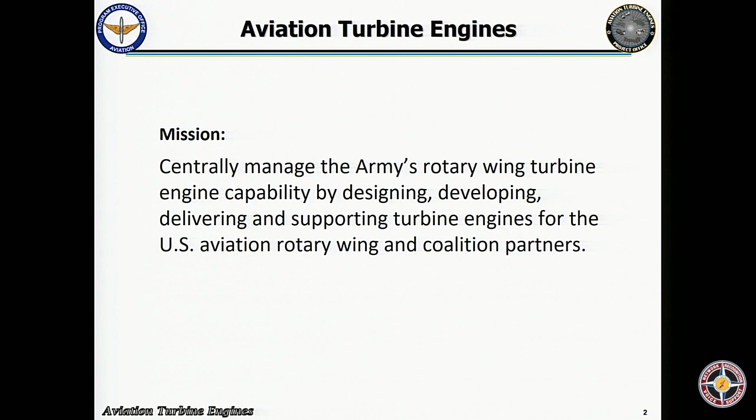And so he established, in February of this year, a combined aviation turbine engine office that took on the mission of not only the ACAT 1C program for ITEP, but also the management of the T55 and T700. As General Muntz has indicated, we're evaluating other opportunities as we make a strategic effort to consolidate and bring on more capabilities associated with power generation. But what we don't want to do is lean forward too fast before we understand how to best manage that activity.

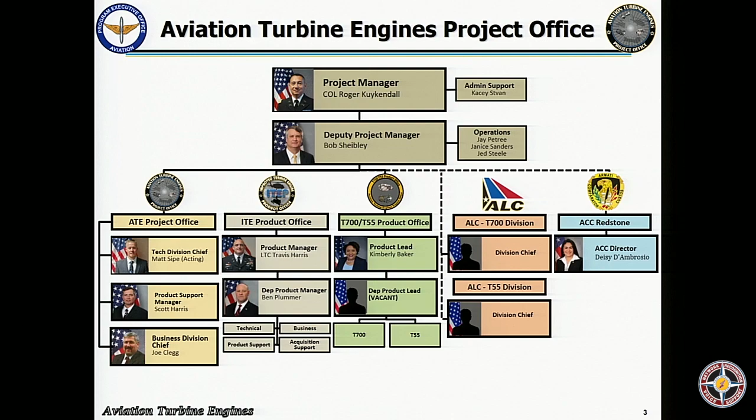So that office I explained is led by Colonel Roger Kuykendall, the project manager, and his deputy is Bob Sheibley. Within the office right now, we have two major product lines: the ACAT 1C for improved turbine engine, and a second product office with a product lead, Miss Kimberly Baker, managing that. We've also established an integrated project office, with on-site ACC at Redstone and an ALC, in order to manage that entire lifecycle component and give us a better acquisition capability.

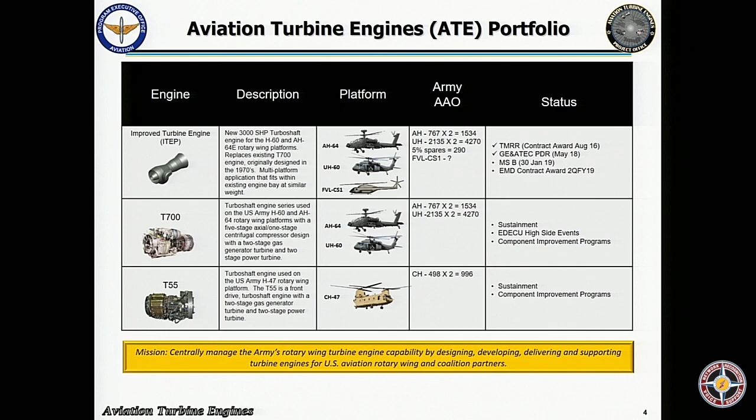So that portfolio we're managing includes the ITEP engine, which is a class replacement engine for the T700 in the future. We've recognized that the T700 has been in service since the 1970s. It's been modified and continued to move forward, and it's performing great, but it's meeting the end of its improvement capability. So the Army leaned forward and looked at development of a new engine to get us the class power required to lift the AH-64 Echoes, the UH-60 Mikes, UH-60 Victors, and what may become the FLRAA as requirements in the 3,000 shaft horsepower range.

Right now, the status of that program—I'll talk more on the next slide about where we stand and the path forward to get it to a qualified capability out to the field. You can see from the numbers we manage, from the T700 to the ITEP, we're looking at about 6,000 engines in circulation to manage that program, and then just right around 1,000 to support the T55 CH-47 fleet.

So ITEP in itself is an ACAT 1C program. We are pre-milestone B. That program was to move forward and bring forward the limitations on the 701D platform to support the H-60 and H-64. A lot of folks get wrapped around the increase in power—the shaft horsepower is a raw component.

The interesting thing to think about is that we're really trying to achieve 6K95 power for those two platforms. There's an altitude lapse rate associated with the engine, and so the target we're looking for is greater than 1760 horsepower at 6K95. There's not an intent to drive in and cause a lot of powertrain integration requirements for the aircraft and other things—it's to have that capability.

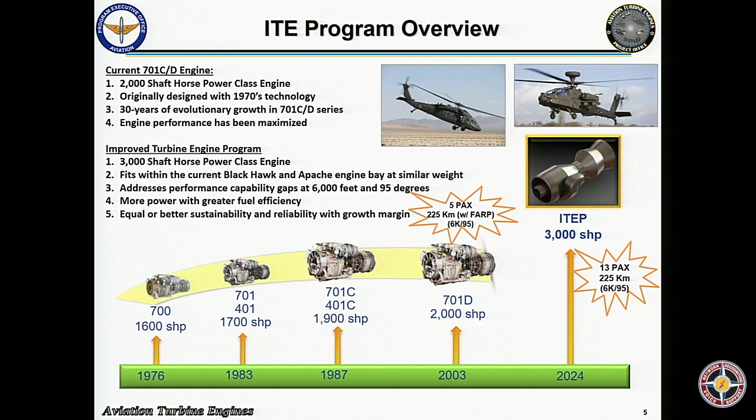As you can see, the 701D in the 2003 timeline is limited now in meeting their mission at 6K95—only being able to carry 5 PAX or having a FARP every 225 kilometers. So what ITEP gains them is the ability to carry that full mission load to achieve that mission at high altitude or high density altitude environments.

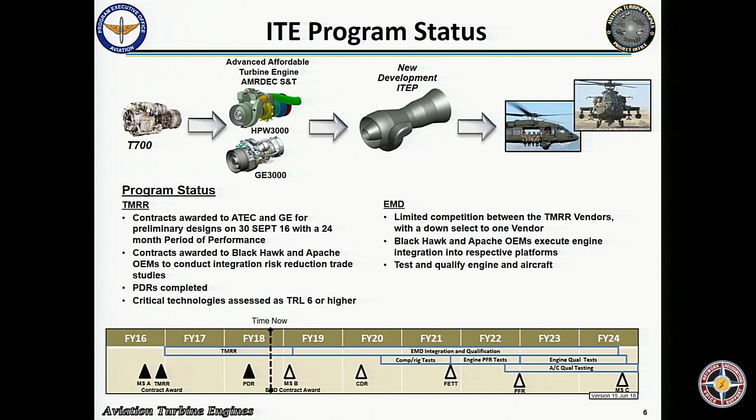So the program status right now for ITEP is that it was a science and technology program that transferred over—the Advanced Affordable Turbine Engine program—put forward the intent to look at hardware opportunities and advancements that would provide better fuel efficiency, better power to weight ratio, higher reliability, and improvements in what was hampering current engines: sand and dust environments. So improved particle separation was a big component of the AATE program.

Out of that program, we established the ITEP and awarded a competitive TMRR contract to 2 vendors: the Advanced Turbine Engine Company, which is a joint venture between Pratt & Whitney and Honeywell, and General Electric, to plan out and provide a preliminary design review for their products to meet this objective.

And so during the TMRR, we did several trades analyses to include supportability trades were a big component of that. And in those supportability trades, we looked at things like human systems integration and maintainability analysis, and advancements in gaining greater availability.

We've also been leaning very far forward during this phase of the program to look at our depot maintenance support planning, reaching out to CCAD, even though we still have to do a formal DSOR as part of the program, which we'll do in EMD once we down select. But we understand CCAD is a center of industrial technical excellence for aviation turbine engines, so we've been discussing how that transition would go, what needs to be required, and we shaped a lot of what was in the EMD RFP based on those engagements and early planning.

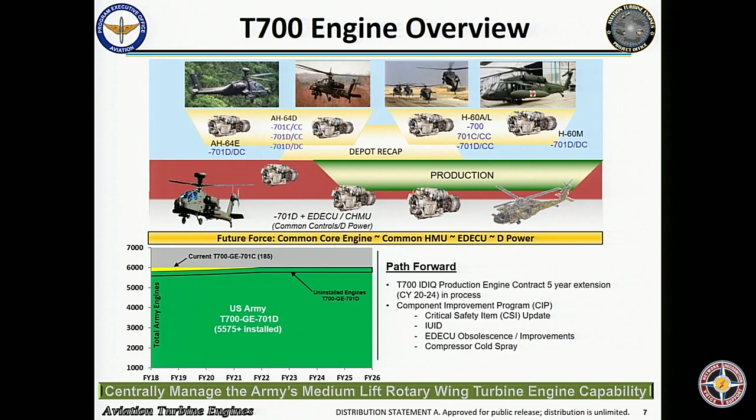We're now removing down to the last of the T701 Charlies, and those are distributed across all 3 compos, not limited to just one, but that number is down below 180 now. Most of the fleet is operating the -701D engine. There's a combination of controls that can meet up with that based on what platform it's installed in, but we're trying to get to a common control system as much as achieving the pure fleet of the 701D.

The office is working through several CIP programs to try to continue to improve. The biggest thing is that we can't focus all our attention toward the acquisition of new products because we recognize it's going to take a considerable amount of time to field all of that. So we've taken a lot of time to look at how we can continue to maintain the current engine throughout its life cycle until it goes through final disposal.

We're devoting a lot of attention toward reliability and continued maintainability improvements to afford better supportability out of the engine. Some of that includes CSI updates to ensure better tracking of parts, including marking of IUID for better asset visibility. With EDECU electronic components, you're constantly looking at DMSMS and end-of-life effects on electronic circuits, so we maintain a lot of visibility there to stay ahead of the game on those components. We're also looking at reliability and maintainability improvements for repairs through actions like cold spray on the compressor.

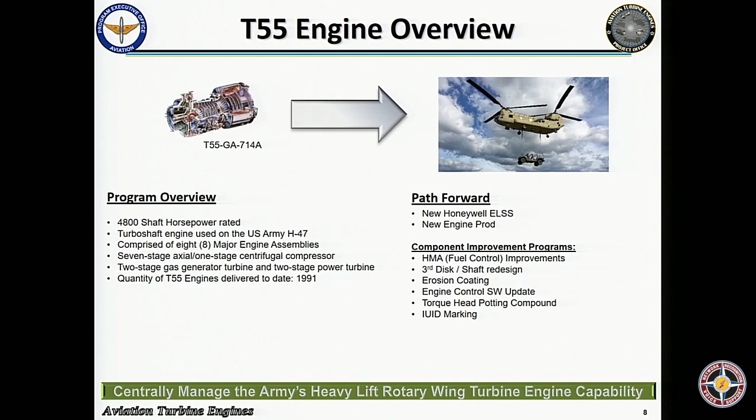As for the T55, the engine is performing very well out there. In fact, we're looking at several areas where we've increased at least once the time between overhaul on the engine, and we're getting ready to undergo a second study to see if we can extend it even further to get more time on wing. There are several improvements within the fuel controls, the HMA, and different ways to address erosion in the field. All of those activities are intended to improve reliability, availability, or maintainability in some fashion.

Okay, and I'll pass it on to Colonel Clark.

Thank you, Scott. I'd offer today that the future of Army aviation is on the cusp of a stepwise increase in fleet-wide capabilities, but I'll caveat that with so long as we don't fumble the sustainment football.

To back that statement up, I would look at what we see in the environment that is either enabling this statement or not. You could argue that the physics of aero haven't changed. We're still applying the Navier-Stokes equations. But what has fundamentally changed, in my opinion, since our last attempts in the 80s, 90s, and even the early 2000s, is access to high-performance computing.

When merged with manufacturing technology, such as additive manufacturing, we're able to now fully exploit those equations and achieve exotic layups of materials, novel designs that address the full complexities of the aero environment. Not only to achieve a material outcome, but to do so in a repeatable fashion, which has always been a challenge as we've tried to stretch the bounds of rotary wing aviation.

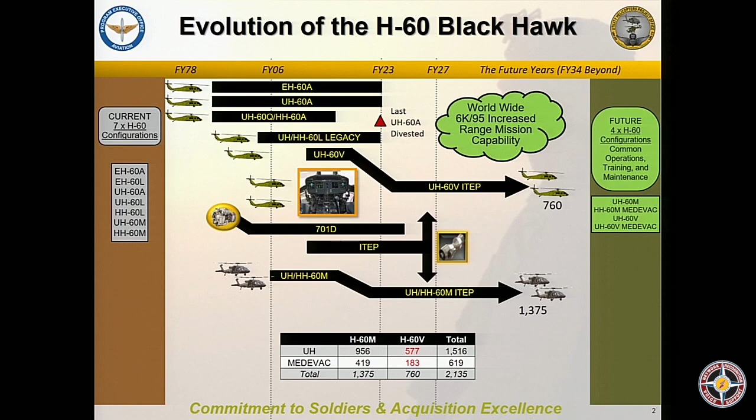We're currently taking action to divest our 60 Alpha aircraft and recapitalize our Lima aircraft into Victors. So we go from that big number of configurations down to four: UH-60 Mike, HH-60 Mike, UH-60 Victor, and UH-60 Victor with a medevac kit installed. We have a plan laid out to get us there as soon as possible. A large part of that relies on CCAD to do the installations on those 60 Victor kits, and I'm going to talk about that in just a bit if you go to the next chart.

Almost—one more, there we go. So it's definitely appropriate for this forum that CCAD is the cornerstone of what we do, and those words can be no more true, particularly for the UH-60 Victor. We're not going to be able to field any aircraft to the fleet without our strong partnership with CCAD, because they are our production facility. We're not going back to an OEM to do that work. All those installations are going to be done right here.

So really what 60 Victor does for Army aviation and our warfighters, a couple things: we are increasing situational awareness, and we're gaining a lot of value in the approach we're taking. All we're really doing is bringing a 60 Lima aircraft up to a 60 Mike pilot vehicle interface capability, with some enhancements on top of that.

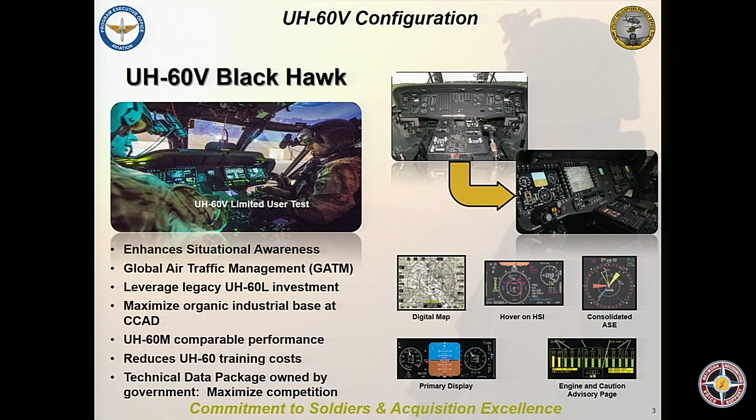One of the things we're doing with our software on this platform is we're using model-based software. So instead of writing single lines of code, which can be fraught with errors, hard to test, hard to find an issue if you have one, what we're doing basically is with a model, you are constructing a wire diagram of inputs and outputs you want, making sure that all works. You push a button and the code just all comes out the other end. The code works; if the model is right, the code works.

In the civilian world, the FAA has already endorsed this. As a matter of fact, if you use SCADE software, the FAA doesn't really care about what that code output is, they don't go through and review that code. So we work very closely with AED to make sure they understand that and streamline how AED approves our software.

Another thing with that model-based software that really allows us to do is integrate new capabilities. It's critically important because the speed of technology, the speed of our adversaries, is getting faster and faster. Model-based software will allow us to integrate those new technologies very fast, so that is incredibly powerful. And then also from a cybersecurity perspective, we're able to integrate new functionality, new capability, very fast in that model-based code. Next chart, please.

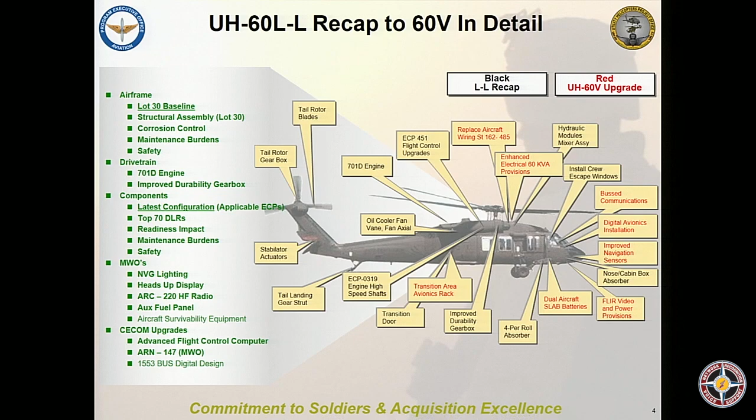There's a number of things we're doing on the L-to-V transition outside of the cockpit I just talked about. We're laying in all the wiring to support a 60 kVA generator when it becomes available and is required. Improved navigation sensors. We're pre-wiring FLIR video and power provisions, which is so important to our National Guard friends.

Additionally, one other thing we're doing with this, the Missouri AvCrad is building a new wiring harness for us, nose to tail. That's going to really speed efficiency at CCAD. It's going to be really important for us. We're going to own the tech data package for that, which is going to allow us to integrate new capabilities at the wiring harness and get it down here.

So if we know it's going to a National Guard unit, and we know the National Guard wants all of these things added on to their aircraft after they get to the unit, they're going to open up the panel and the wiring is just going to be there. All they have to do is plug it in. They don't have to tear apart the whole aircraft laying wiring. So it's going to reduce costs, increase efficiencies, and get the capabilities out there.

Next chart. Okay, so I'll just caveat, this is a tentative schedule here, but we are really leaning forward in the Black Hawk project office. We're doing a lot of DMWR and work right now. We're doing a lot of engineering analysis to figure out exactly how we're going to recap 60 Mike aircraft, because we're planning on doing that here at CCAD as well. So we feel like we're ahead of the power curve here.

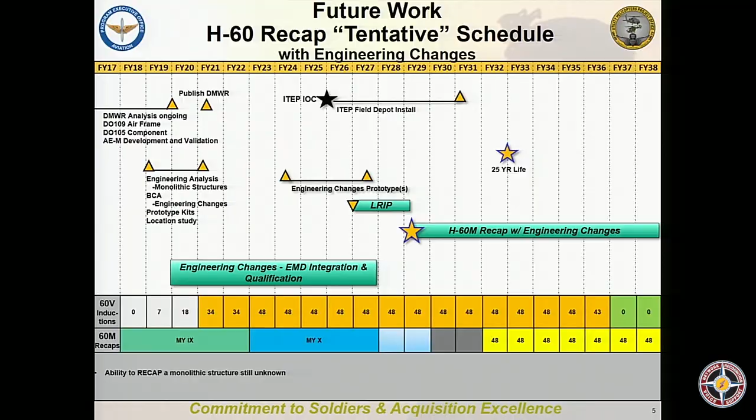You'll see ITEP integration on there. We're going to be starting that in the blink of an eye, doing that in the field, but then also our goal is to get those ITEP engines integrated in down here at CCAD when those aircraft come off during the recap process. We hit the 25-year economic useful life in FY32, and our goal is to start on those first 60 Mike aircraft at that time.

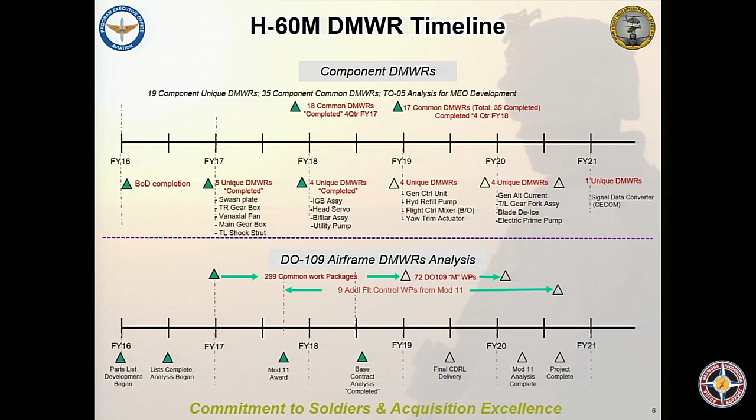Next chart. So this is just some detail again on our DMWR timeline, how we're getting from point A to point B. I'm not going to dwell too much on this chart other than just to reiterate we're leaning forward as much as we possibly can to make sure we're prepared to begin this work on time at CCAD. And that concludes my comments. Thank you.

Good afternoon, everybody. My name's Tim Sweeney, and I am the product support manager for Apache. The first thing I wanted to go over is quickly explain to everyone what a product support manager is, because as I travel around, I find out that a lot of folks don't know.

In 2008, there was a GAO study that determined that life cycle logistics and the costs were being traded off during the acquisition process. In an effort to fix that, Congress codified into law in 2010 the position of a product support manager. What I am chartered to do is make sure that the realm of the possible and the good ideas that the smart engineers come up with is actually supportable and sustainable at a reasonable cost. So that's what a product support manager does. So if you see that on a chart, that's actually what we're doing behind the scenes.

As far as the Apache system, it's pretty much a hybrid. We have two performance-based logistics contracts. One of them with the airframe is done by Boeing. The other one, as far as sensors, is Lockheed Martin. And we also have some work done at CCAD. One of the things that CCAD provides to us is the T701D engine. So you're a critical part of a remanufacturing line.